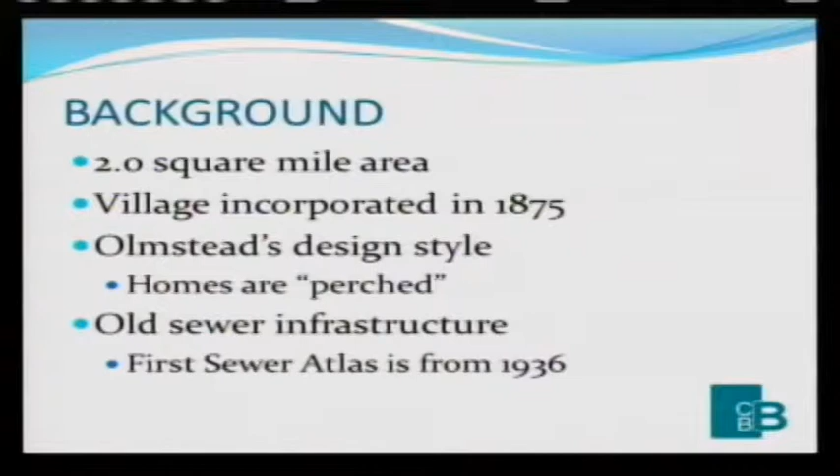Our objectives for this study were to develop an H&H model of your sewer system. H&H stands for hydrology and hydraulics. Hydrology is basically when it rains, how much of that water soaks into the ground, how much runs off. And then the hydraulics is where it goes, what happens once it gets into your sewer, what kind of capacity do you have.

Another objective was to take this computer model we're going to build and have it spit out all this data. It's really good stuff to have, to plan improvements in the future. It's completely integrated and meshed with your GIS, your Geographic Information System, and it'll allow us to update and modernize it.

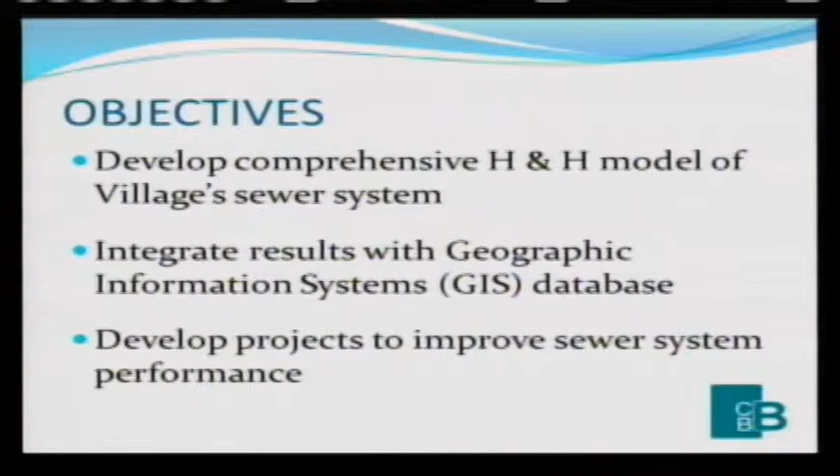Finally, the third goal was to come up with a handful of projects based on what we learned about the system, to give us the best bang for the buck. Where are the areas that we should turn to first when we start to look to improve the system?

As was mentioned, Riverside is primarily a combined sewer system, meaning there's one pipe in the street which carries both storm water and household waste. When it rains, the water gets into the sewers, and it's also connected to everybody's home, so all your household waste goes into the same sewer. There are a few intermittent storm sewer systems that discharge directly to the river, generally on the west side of the village. There are also some relief sewers built over the years that supplement capacity.

All those different sewers go to one of three places: either the Des Plaines River, where the storm sewers discharge directly; the MWRD interceptor pipe; or the TARP system. These are basically big MWRD pipes that collect that combined sewer water and take it to be treated.

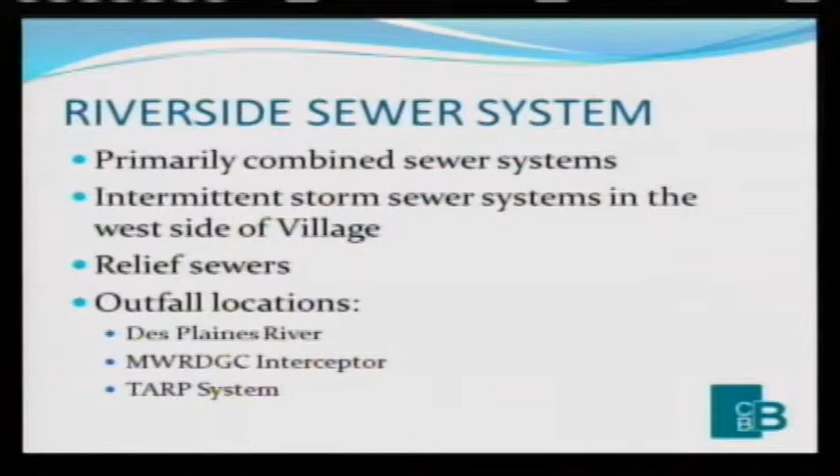This graphic depicts that. Up here is your local combined sewer, the sewers on all the streets that pick up water from the streets and yards. You can see from the picture that your house is also tied into that same pipe. That drains through the network of streets and is first connected to the MWRD interceptor pipe. In Riverside, in most places, it's an 84-inch pipe, a big pipe, and it flows south to the Stickney plant where it's treated.

When that pipe eventually fills up, the water's got to go somewhere. Historically, it would have flowed directly out to the river. That's called a combined sewer overflow, a CSO. Obviously, when that happens, you've got some unhealthy water going out to the river, and that's what we try to avoid.

Over the past few decades, the MWRD has been building their TARP system, the tunnel and reservoir plan, which intercepts all that water that used to go to the river and collects it in giant underground tunnels, taking it to one of several reservoirs. That system isn't complete, it's still under construction, so it does frequently fill and has a finite capacity. When it fills, those CSOs still happen, and there are three of those CSO locations in the village.

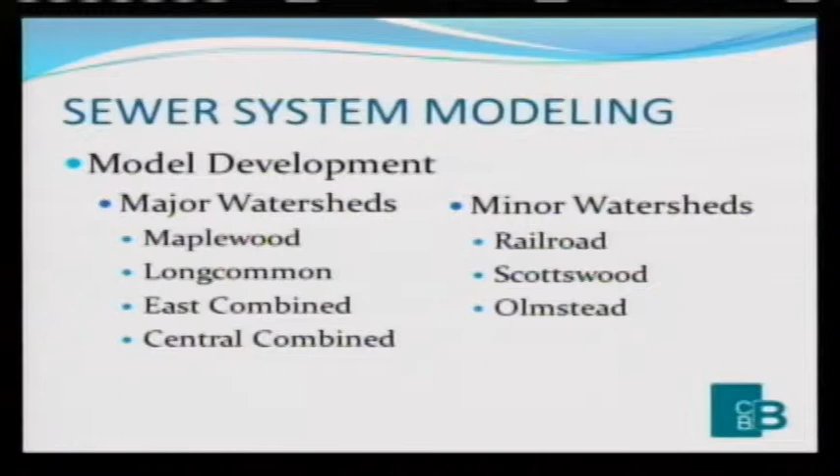When we start to review all this data, the first thing we determine is where the major and minor watersheds are, where the systems come together. We identified four major and three minor watersheds, shown here on this figure. You can probably see them better in your packets, but I'll talk through them briefly.

The biggest one, on the east side of the village in yellow, we're calling the East Combined Watershed. It's strictly combined sewers here. The main sewer is a trunk that runs down Delaplaine down to Ogden and ties into an MWRD sewer along the river. That watershed is about 315 acres, the largest of these systems.

In green here, we call the Olmstead watershed. That's drained by a relatively small pipe, a 26-inch pipe on Olmsted that ties into an MWRD sewer.

In pink here, kind of in the center part of town, we call that the Central Combined Watershed. Again, combined sewers. Its main trunk sewer runs right down through the center of town here. That's a 48-inch pipe that ties into the MWRD sewer.

The remaining systems, this one in blue here, Maplewood, this is the largest storm system you've got. This one is completely separated, so everything in blue here drains directly out to the river. That watershed is 80 acres.

The two remaining: the area west of the river has a storm sewer system that comes across the river right at the railroad there. We call that the railroad watershed. And finally, Scottswood watershed - I'll probably refer to this as the peninsula at some point because that's kind of what I've been calling it. This area is partially storm, partially combined, but it connects to a combined sewer that runs right along here. So that's kind of the lay of the land.

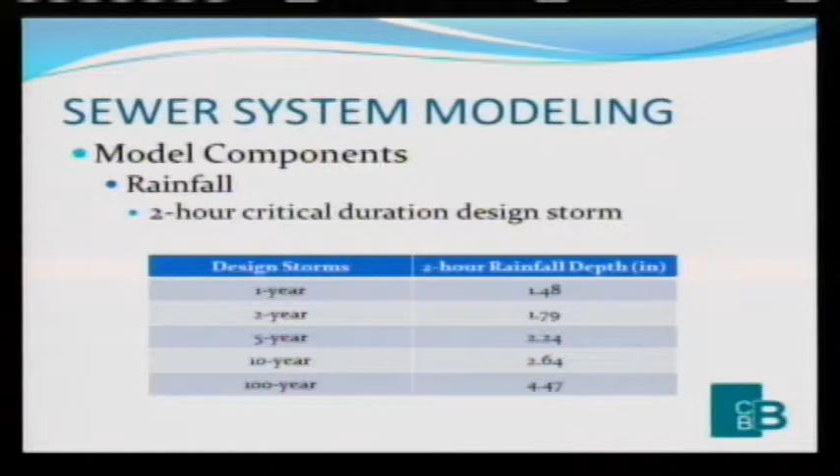So this is your worst-case scenario? Your worst-case scenario is what we're... Okay, but I'm not getting why a 2-hour storm would produce more runoff than a 6-hour storm, is what I'm not understanding. Because it falls in a shorter period of time, it's more intense. Oh, when it's concentrated. It's more concentrated, okay. Yes. All right.

Yeah, and if anyone, feel free to jump in and stop me if something doesn't make sense, or if you have a question, I'd rather you stop me now.

Many of the towns we deal with have more of these depressional areas - this is not Riverside. Typically those overland flow routes tend to converge on these depressional areas. These would be areas where the streets, for whatever reason, are just lower, and all those overland flow routes converge - you may get 100, 200 acres draining to one block that receives the brunt of that runoff. You have very few of these in the village, and you should be thankful for that. That goes back to what we talked about, the Olmstead design.

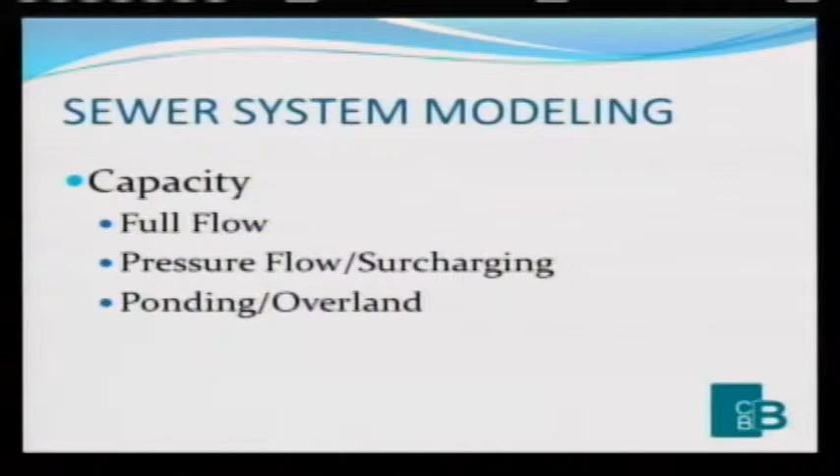Well, unfortunately, that's a bit of a nebulous term. It's a little ambiguous. There's different ways we can define capacity. So I wanted to talk about a couple different terms, the way we would describe it, to give you an understanding of what that term means. The three different terms we'll talk about are the full flow capacity, the pressure flow, and the overland flow.

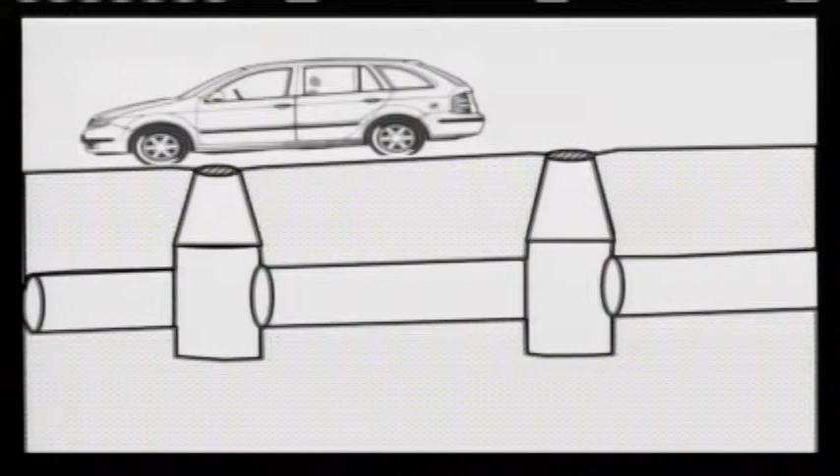We've got a little cartoon graphic - this is your sewer system. Here's a typical manhole, street elevation on top. As it starts to rain, water comes into the system and by gravity starts to flow downhill. This is just run-of-the-mill flow. As the storm gets bigger and we get more rain coming in, it starts to fill up that pipe.

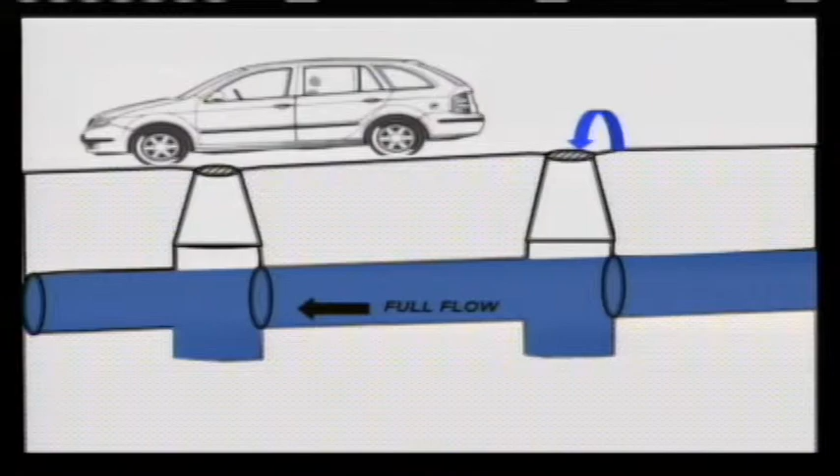Very logically, when the pipe is full, however much water it's carrying, that's what we call the full flow. That's strictly based on the size of the pipe and the slope of the pipe. That's one way to say what the capacity is. But that's not the most flow that the pipe can carry.

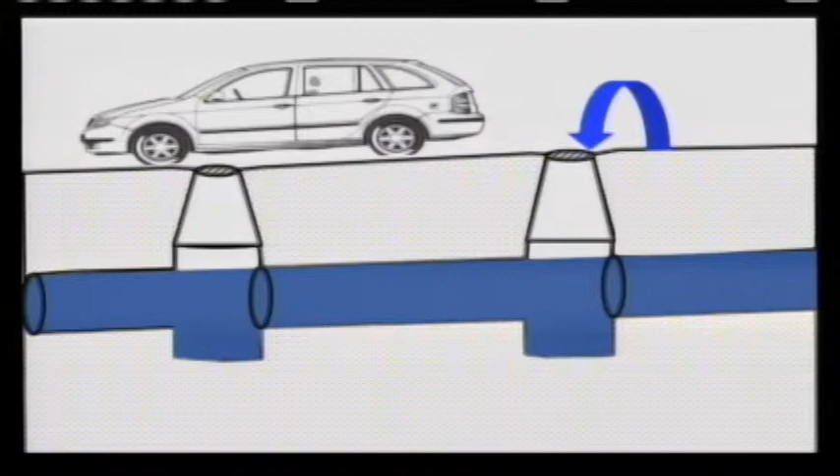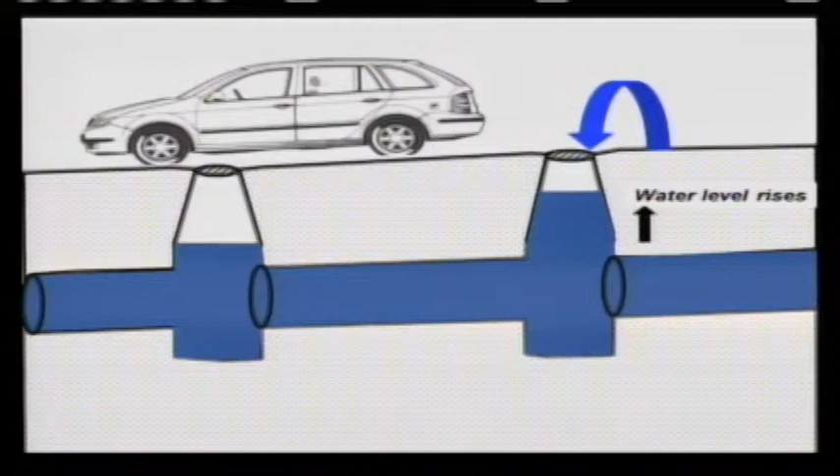We know when we get these big storms, we get more and more water coming into the system. And when that happens, the water level in the system rises. That rising water puts everything under pressure and pushes more water through. We call that being surcharged. So when the pipe is surcharged, it's carrying a little more flow - it's able to push it through faster.

Your engineering 101 term of the day: if you were to connect all the lines in the system, all those points, that creates a line we call the hydraulic grade line. It's nothing more than an indication of where the water level is at a certain point at a certain time. That's the hydraulic grade line - you may hear that term later. So that is the description of a surcharge condition.

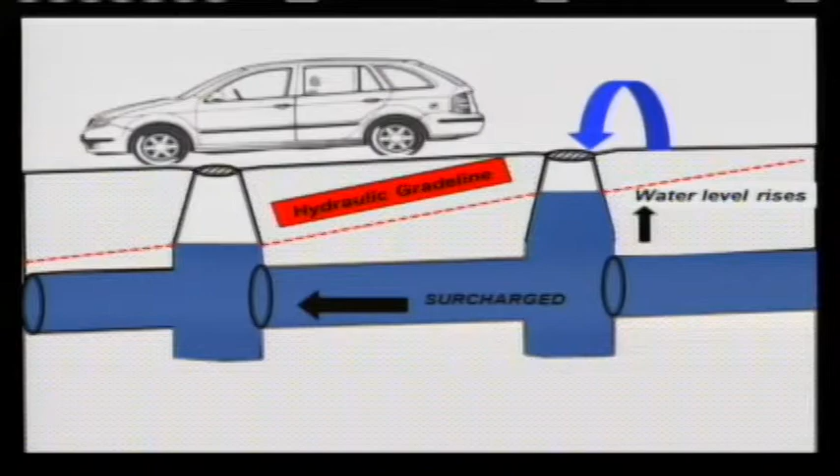And then when we get these really big storms, eventually the sewers can't handle it. It gets up to the surface, and there we've got overland flow. So when we have overland flow, at that point, that's really the maximum flow that the sewers can handle. We call that overland flow.

So as I mentioned, we have all this information in the model. We run all these different storms and it simulates what the capacity is. Really, the answer to that question kind of lives in the model - it's built to be viewed in the model and interpreted that way. So one of our challenges is how do we put it on paper in a way that makes sense? We've done that in three different ways - three different sets of exhibits in the report.

Surcharge depths, overland flow paths, and then something we call the sewer capacity atlas.

Here's an example of a surcharge depth exhibit - you've got these in the report. What this drawing shows: every dot on the drawing represents a manhole, a point in the sewer system. We've color-coded them and broken them down - you see in the legend there, a green dot means that hydraulic grade line, that water level, is at least 3 or more feet below the surface, below street level.

3 feet was just an arbitrary number we picked - there's nothing really important about 3 feet. The yellow dots mean it's somewhere above that 3 foot line and street level, so it's near the surface. The red dots mean the water level is above street level, so you would have overland flow like we talked about. So here's the 10-year storm.

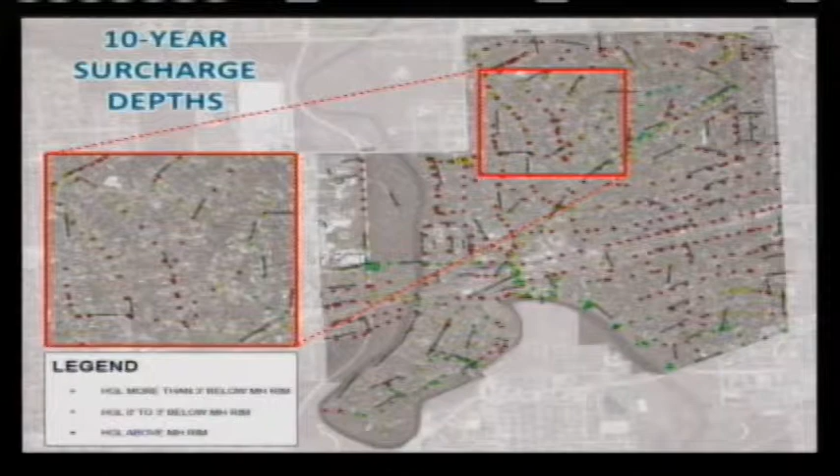So that really is the first bullet point, our first objective, the evaluation of the existing sewer system. Those exhibits are the way that we can display the results. They're also in the GIS system that meshes with the system you have, so all that information is there digitally.

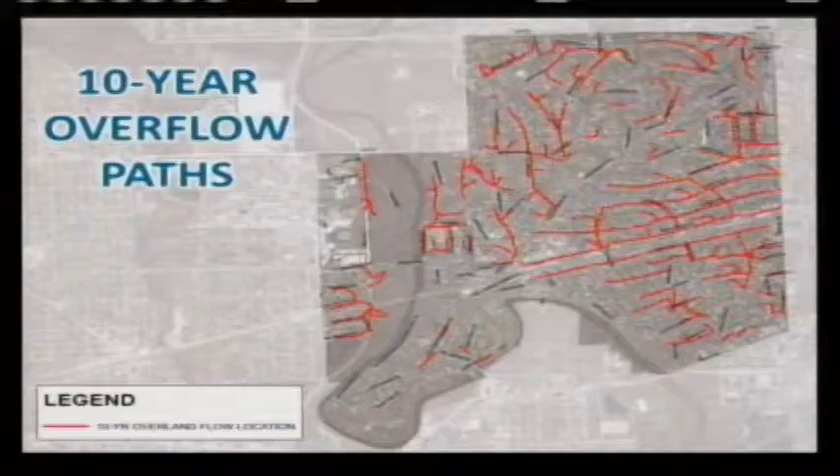The combined sewer overflows or outlets. Overflow. Yep, so just to make sure I understand how this works - first it would go into the interceptor. If you can bring that back up, the figure on the third slide you showed.

So it goes into the combined sewer - does it automatically go out of the CSO if there is a CSO on that line, or does it first go into the interceptor, and only go into the CSO if the interceptor is full? It will first go into the interceptor - this is a generic figure, but the way it's connected, it will dump directly into the interceptor and won't be able to get back out unless it's full and rises up to the surface. And does that just happen automatically?

Are there valves or gates that have to be open to allow this to happen? No, that all happens automatically. There are gates at certain points of the MWRD system, which leads to the perception that someone closed or opened a valve - that's always a point of contention after a flooding event. But within the village and vicinity, there are no valves. It all happens automatically by gravity, just by flow of water.

When the interceptor's full, there's nowhere else for the water to go. It'll flow out to the TARP, and if the TARP is full, it will flow out to the river. So it's interceptor, TARP, and then CSO in that order. Correct. CSOs are not common - only in very old villages, because we have to have them monitored all the time.

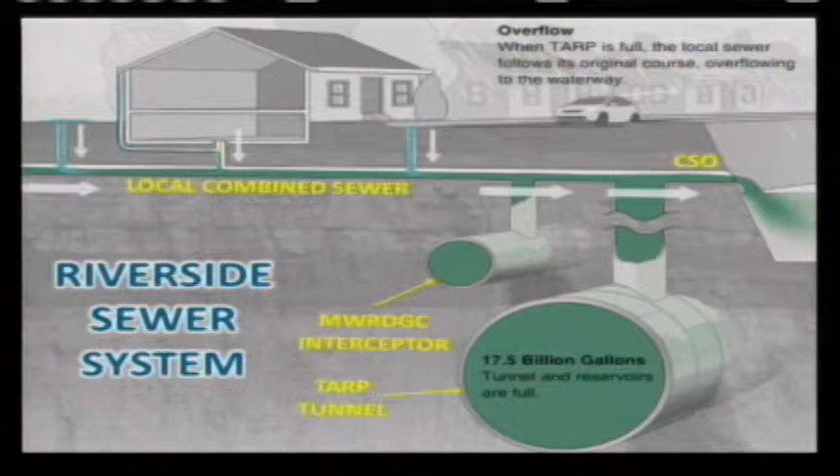Once the water's in the interceptor or the TARP, I don't know exactly what controls MWRD has on it in the region, but as far as this slide, at these connection points, there are no valves to be closed. I thought we had more connections to the TARP tunnel than the Metropolitan Tunnel - do we have more than one? Isn't there one by the high school, a drop shaft to the...?

Well, this blue line is the TARP tunnel. Right, it goes off the page here, and at First Avenue there's a connection to another major TARP tunnel. Right, and that drops to the deep tunnel? The deep tunnel is another term for the TARP system. But the one on First Avenue is particularly deep and large - I think it's a 33-foot diameter. 33, right. And that's part of the deep tunnel project?

Yes. And when are the rest of the reservoirs within the TARP system supposed to come online? Are there two that still aren't finished? There are 2 reservoirs under construction, with some phasing to them - I think there's a temporary reservoir that's online. I thought the last I saw was 2017 for when the McCook Reservoir would be online. I think that's correct. Anything else? Thank you.

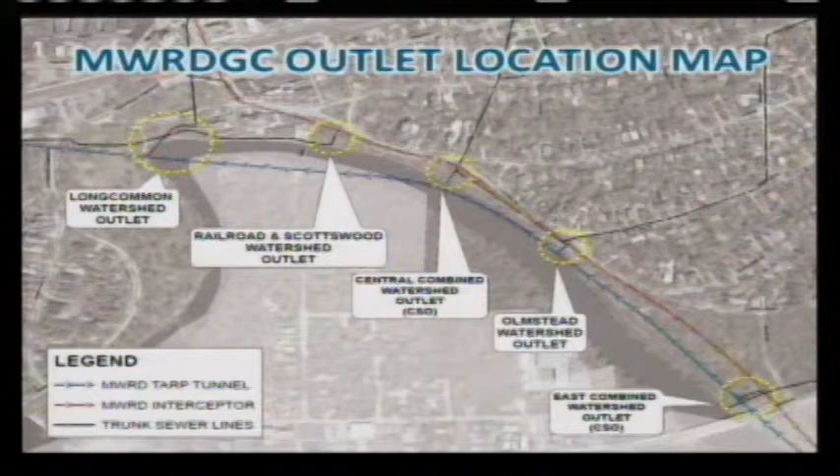So let me skip back forward.

So now we'll talk about this. We've established the existing system capacity and parameters—we know everything there is to know about it. So now we're going to look at what sorts of projects we'd recommend. Not necessarily the main problem areas, but given what we know about the system, what projects would be low-hanging fruit, easiest to get working on right away, taking advantage of opportunities the system gives us.

For each project we're looking for the lowest cost, things easy to construct. We always want projects that reduce the potential for basement and sanitary backups. Wherever possible, we look for areas where we can separate the sewers—that's good environmental practice and helps eliminate the connection to the combined system, which is consistent with the village's green initiative.

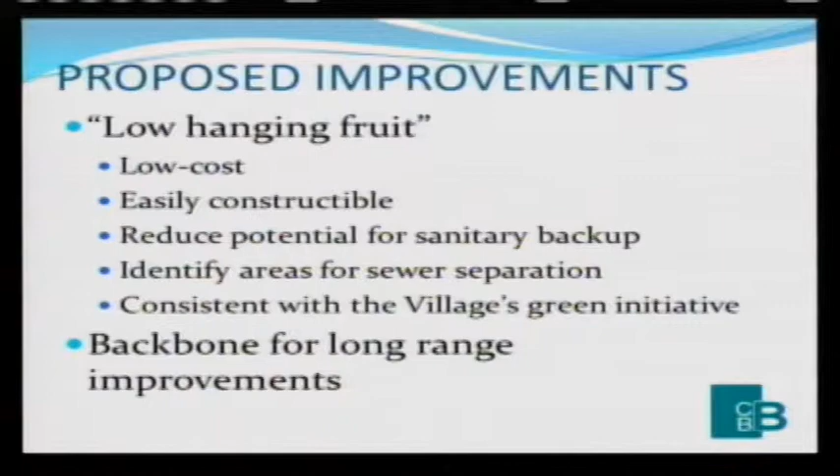Beyond those, we've identified 8 projects here. Beyond that, the work we've done will serve as a backbone, a template to develop other projects if there's even longer-term planning we want to do.

At the end of the presentation I'll show a drawing of how this map would change if we implemented these projects—more blue storm area and less combined area.

The first project is in what we're calling the railroad watershed, the area west of the river. The area shaded in green, about 40 acres, already has storm sewers out there—they've been separated and converge at a point just south of the railroad. They cross under the river and tie into a combined sewer, which flows east into the MWRD system. We're introducing 40 acres of water into this 24-inch pipe, which connects to all the basements in the Scottswood area. So we want to take that water off the system.

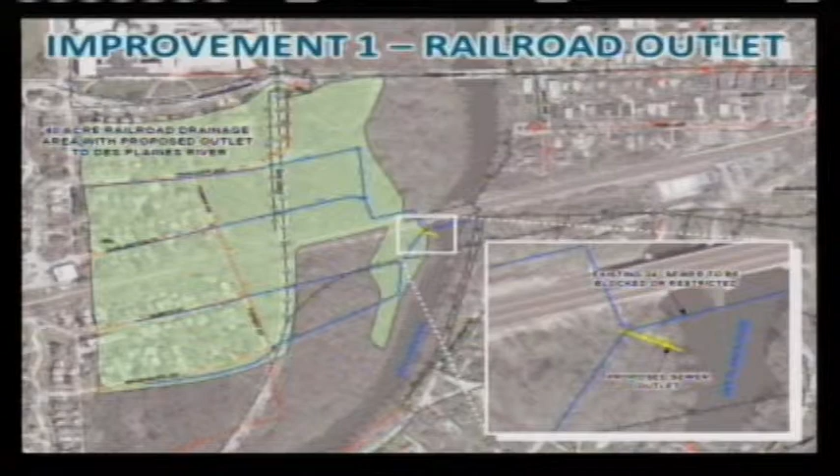Because the storm sewers are already on the ground, this is the lowest-hanging of our low-hanging fruit. Before it crosses under the river, we'd block that pipe and give it a new outlet to the river. This separates the 40 acres easily, takes the load off the combined sewer, and helps our neighbors downstream. This project has an estimated cost of $64,000—essentially a couple manholes and 50 feet of pipe. It's a very simple project.

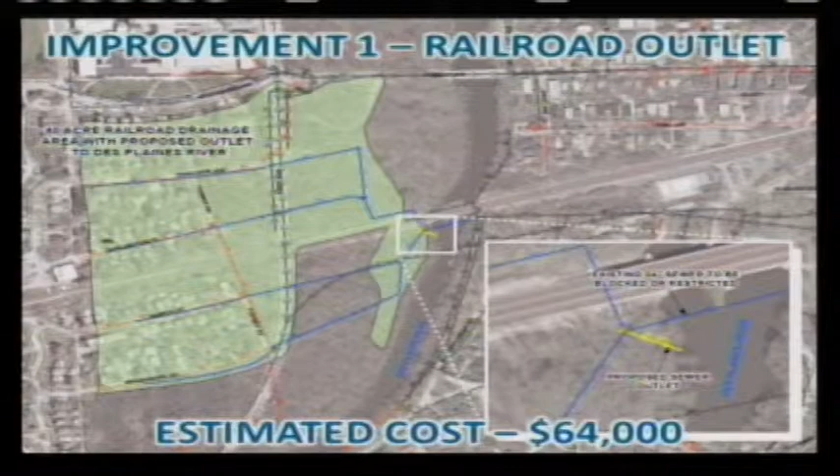The second project goes hand in hand with the first. The Scottswood area, this peninsula—everything you see on screen here is existing. These red or maroon lines are the existing combined sewers. All these streets, household drainage, and sanitary water connect into this 24-inch line.

So this line ties into the MWRD system. At times it backs up. Like we just mentioned, this 40 acres from the west drains into this relatively small 24-inch pipe, and that causes backups in this whole area.

Project 2 is primarily a project that will help with basement backups. We've already talked about how Project 1 would eliminate that area. The next step would be to remove all the water from that 24-inch line, and the way we'd do that is go through this whole peninsula and look at every street.

Where does the inlet go? Right now, there's an inlet on one side of the street that might go to the storm sewer, and the other side of the street might go to a combined sewer. It's really scattered in this area. So we'd go through and make sure everything goes to a storm sewer, adding new storm sewer where needed. That's what's shown in yellow here, utilizing existing outlets to the river. In doing this project, we'd basically eliminate all the stormwater getting into that 24-inch pipe on the north, the one that's causing the backups.

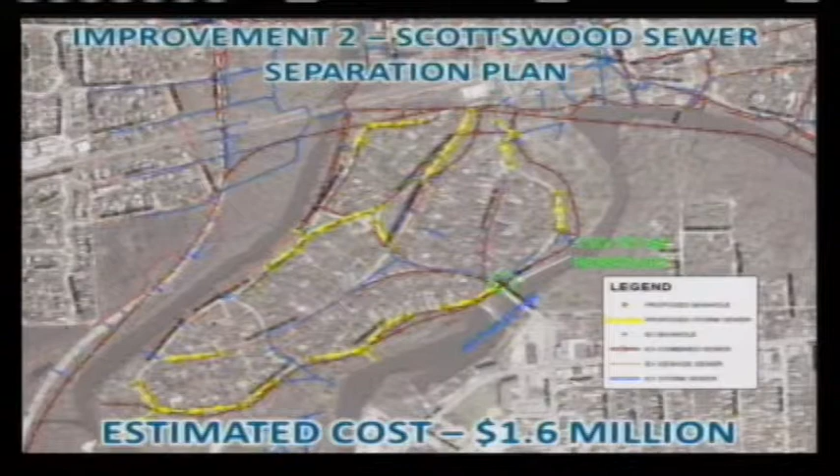So I mentioned projects 1 and 2 go together, they'd kind of go hand in hand. Project 3 is really a standalone project on Maplewood.

This is one of our already separated sewer systems, but we've got a lot of overland flow area that comes down, and this is one of those depressional areas I mentioned. All the water from those 80 acres or so collects down in this area. This is also a spot where when the river gets really high, at flood stage, you get overbank flood from the river that fills this area.

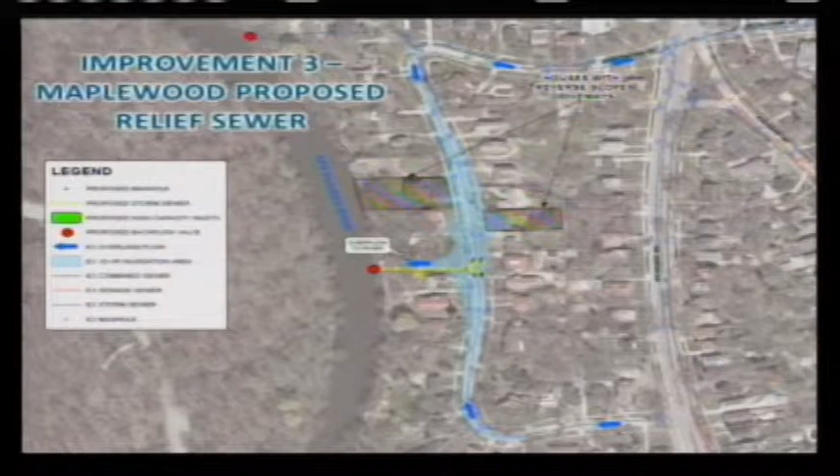So this project would just give some more capacity, an additional outlet to the system. We're showing a 30-inch pipe. The project would include a handful of inlets at that lowest point to collect the water and send it out to the river, so that when you get that overland flow and ponding in the street, it allows us to get it out to the river. That's got an estimated cost of $150,000.

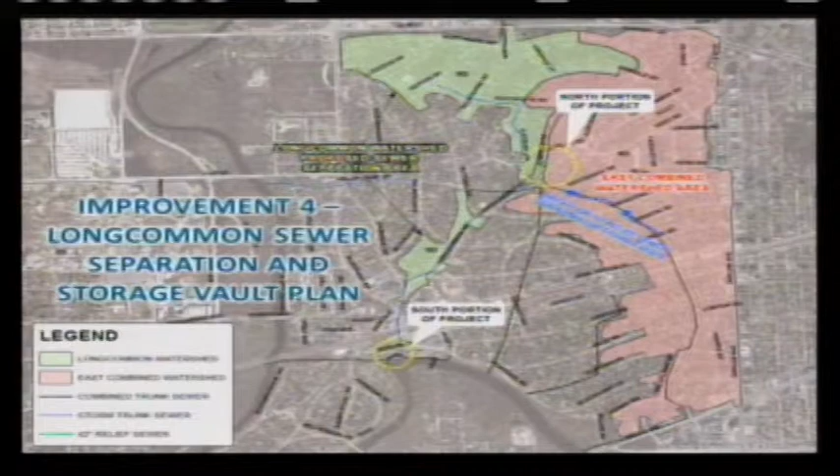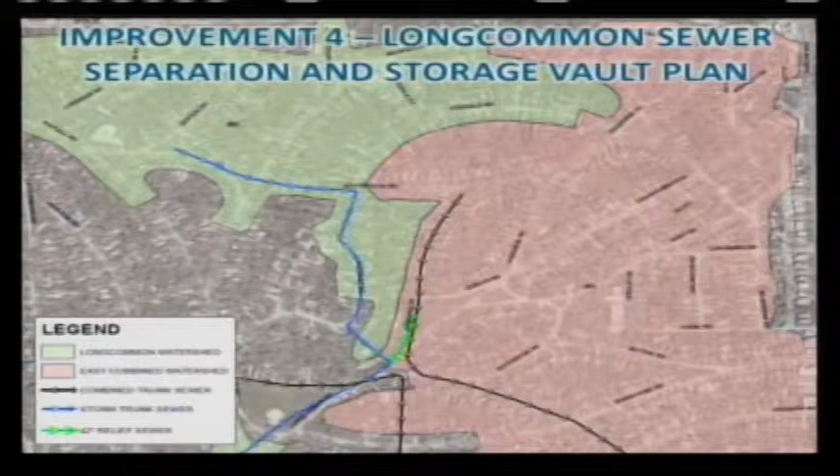So the project would be, how do you eliminate that cross connection? Very simply, you block it. So we eliminate the connection between the two, but we need to recreate what it did. That 42-inch pipe provided a relief to the combined sewer, allowing it to dump into the storm. We need to recreate that because we don't want to cause problems where there's not problems today, or make things worse for anybody.

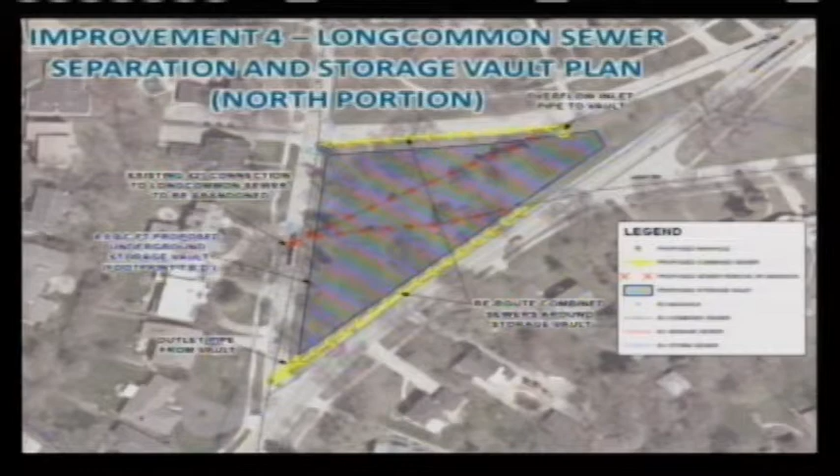And then the second part of the project is down by the river. Here's the Long Common storm sewer. We've separated out all the combined water from it. We've got pure storm, so we can take it out to the river and eliminate this TARP connection so we no longer get that back up. The cost of this project is $2.8 million.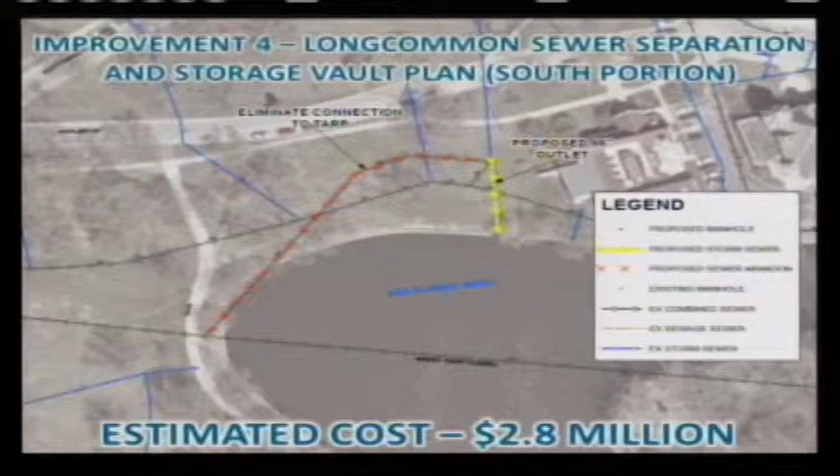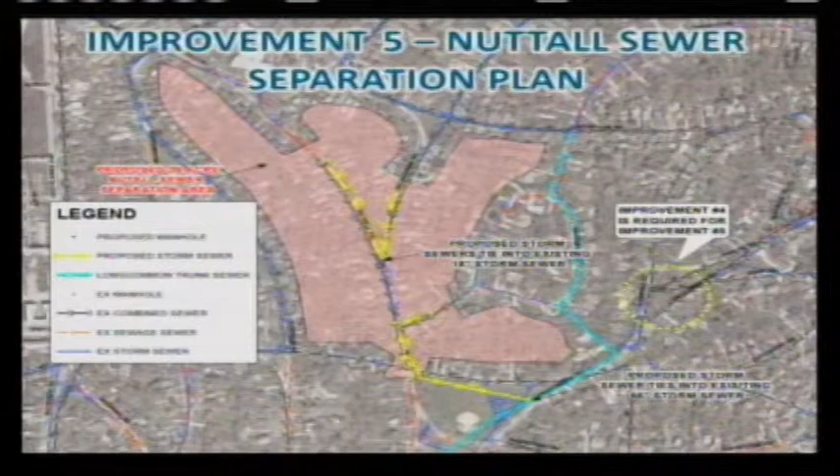And the cost of that is $570,000.

Project number 6, we're just calling rear yard storm sewer connections. These are the areas we talked about where there's depressional areas in the rear yards that hold water. And the project would be, we would look at these on a typical basis. There'd be a lot of coordination with the property owners, but putting some drain structures in the low points, some catch basins, connecting them with small pipes and draining them out to the streets. Small pipes so that we're not overloading the sewer system, but yet we're allowing it to drain quicker than it does today where it just soaks into the ground.

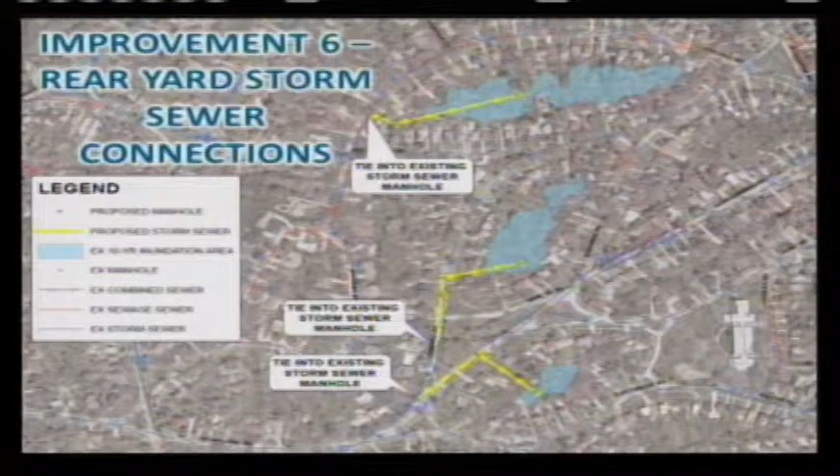We show 3 here as examples, but this could be extrapolated to other areas. And generally, we've calculated a cost of about $75,000 for each one of these rear yard areas.

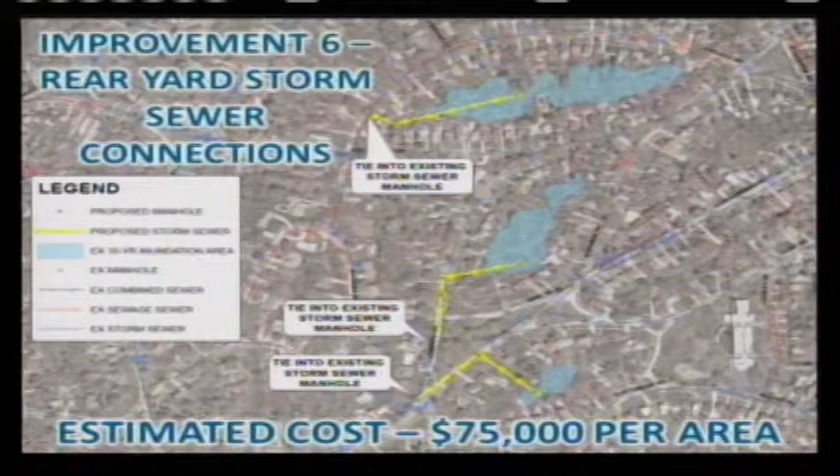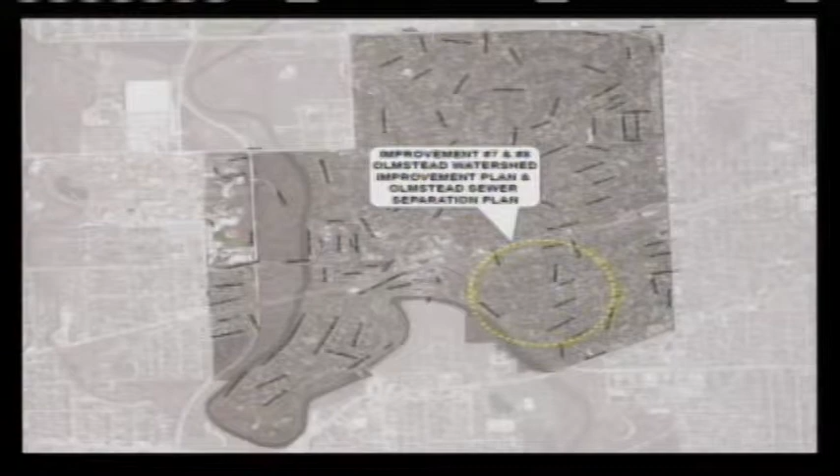And finally, we've got Projects 7 and 8. I'll talk about them together because you would do one or the other, not both. This deals with the Olmstead watershed. That was a 100-acre watershed that was drained by only a 26-inch pipe, so it doesn't have real good capacity.

So the first thing we looked at was Project 7, where because some of the other projects would take away a lot of water that's going to the MWRD, we would go back to them and say, we want to upsize the pipe, the connection we have. We want to put more water into your system, or at least put it there faster in this particular spot. So we would basically replace the existing pipe with a larger one, 36 inches what we're showing, following the path of the existing combined sewer. And it has really good benefits as far as capacity and basement backups along this path.

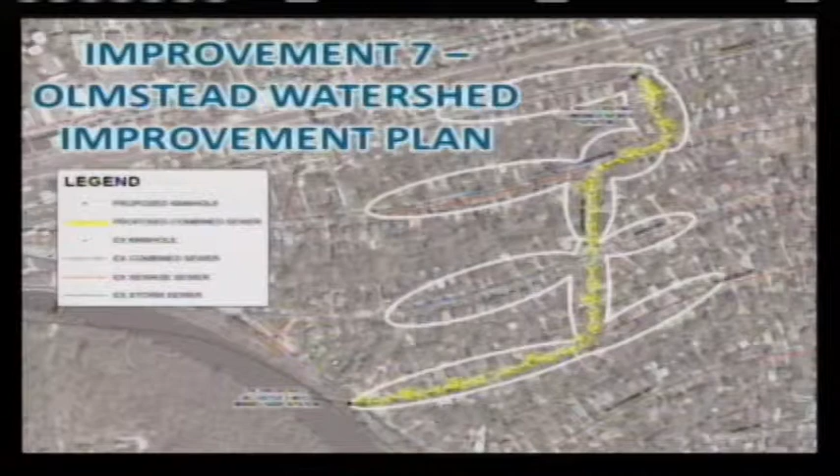The bubbles in white here show the areas that would benefit most from this project, but you can see they're kind of limited to where that new combined sewer is. And again, this would be a new combined sewer, not a new storm sewer. So we determined a cost for that project at $960,000. Didn't seem like the cost benefit made a lot of sense there, so we took it the next step.

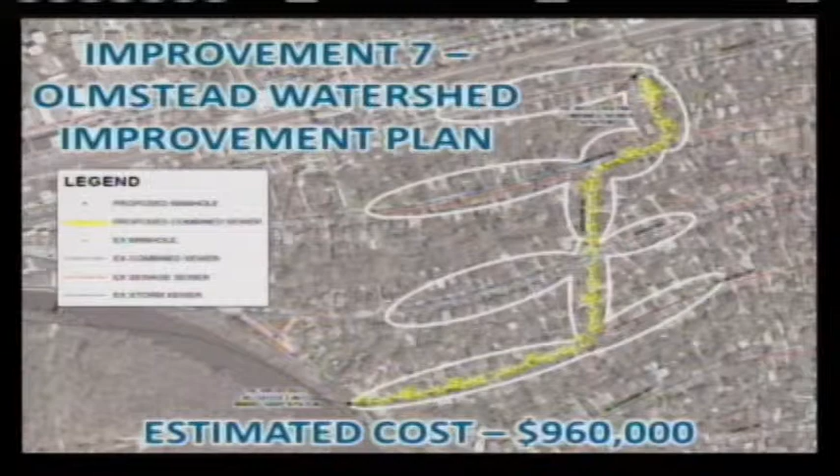If you're going in that deep, you might as well look at separating this area out. So Improvement 8 would be a more involved project, but generally this watershed would be separated. We'd put a new storm sewer system there, drain it out to the river. We'd be able to separate 56 acres at a cost of $1.6 million.

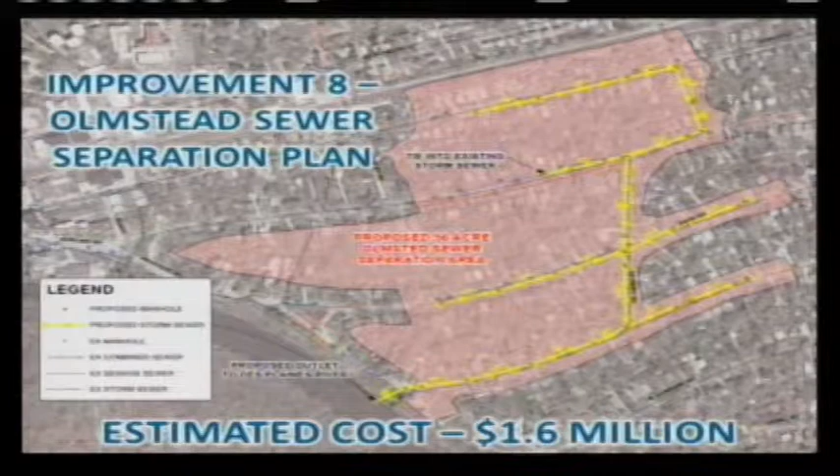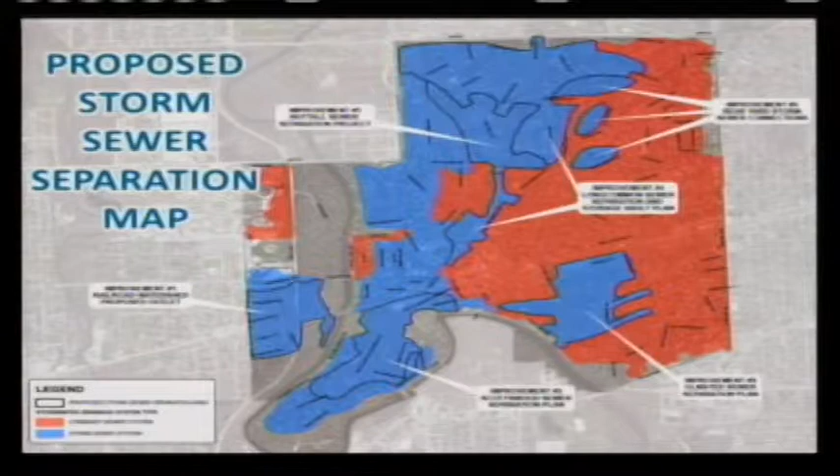So going back a few steps, this is our existing condition map of storm versus combined. The storm sewers are in blue, the combined sewer areas are in red. And if you were to implement all of these projects, here's where you would be as far as how much the village would be storm versus combined. In the callout, it shows the different project areas that would achieve that change.

And longer term than this, these 8 projects would get us this far. Beyond that, it would take much larger projects, probably another order of magnitude, to continue to separate out the rest of the red area.

Can I ask you this somewhat simple question? Sure. It's so simple it may be stupid.

If we have 3,200 households in the village, and you said backup would come into a house unless it had an overhead sewer or a check valve, if we had 3,000 households and it cost $3,000 per household to put a check valve in, wouldn't it be cheaper to spend $9 million to put a check valve in every house?

That would be one thing, and a lot of villages have developed grant programs for that. Typically I've heard between $6,000 and $10,000 to do overhead plumbing. Check valves would be something less reliable than overhead plumbing, but yeah, that's certainly one way you could approach it.

Now what would be the long-term negative effect of that environmentally? I would assume, because if you shut off all the sewage from coming back into people's houses, it's going to go downhill. But eventually it all goes downhill anyway because it drains out of the house anyway. Right, yeah, doing it in a fashion like that, a large scale individual house flood protection, you don't eliminate any of those combined sewers, and you're still treating all that water.

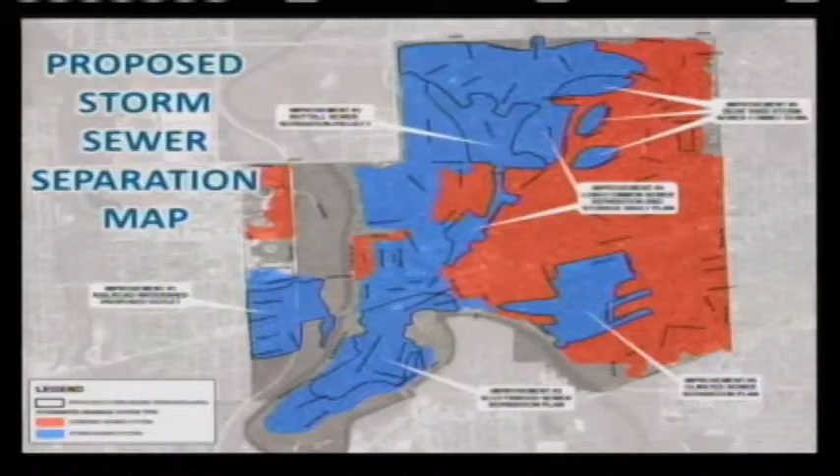I think Brookfield's offered a grant program related to check valves or overhead sewage, so if you guys want to look at that, I know they have that. We put that in our house seven years ago.

During this study, were you looking at the condition of the pipe? Did you view any footage or video of existing conditions? No, it wasn't in our scope to do any extensive televising. We've probably done some of that in general in some locations, but not comprehensively throughout the village.

Just reiterating on that, I do have a copy of all of the televised sewers that have been done to date, and we have categorized those by condition already, separate from this. So we do have a prioritized list of conditions on sewers that have already been televised.

The only reason I ask is, Ed, I know you have your wish list of sewer projects - are any of these projects tied in with what you have on the forecast for the near future?

In the aftermath of this project, we would kind of rethink. We had some initiatives previously, before this project was initiated and now completed. Now that this project, the village-wide comprehensive sewer system evaluation, is completed, what we should be doing - and I expect we will do - is rethink these other initiatives. It may not make sense to push forward a project that's rather limited in scope when, following this presentation, there might be better ways to spend that same money that will have much more benefit. So I think we're going to go through a process of rethinking and prioritization - you could call it game planning also - and part of this now becomes financial planning also.

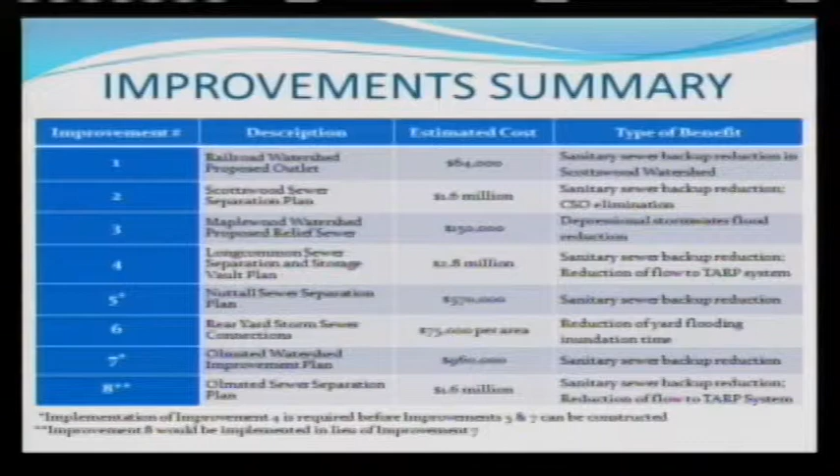If I wanted to get the maximum bang for my buck, the way it sounds is I would do - well, it depends on what the buck I had - but projects 1, 2, 3, and 8 for $3.5 to $3.6 million would give quite a big relief to this village.

1, 2, and 3 for sure. I think 4 or 5 versus 8 would be maybe a - we ranked them this way for a reason. Basically, if you look at project 4, the area that it separates per cost is a little more - you get a lot more area separated out than you do for 8, but they're pretty close. But 4 and 5 are $3.5 million versus $1.6 million.

One thing I didn't mention is these separation projects, project 4 in particular, would take a lot of water away from MWRD's treatment, and we would certainly approach them about participating or cost sharing on the project. They are accepting proposals for projects and have given out some funding, so we think these types of projects would be favorable. They look at them favorably, and that's something we would approach them on.

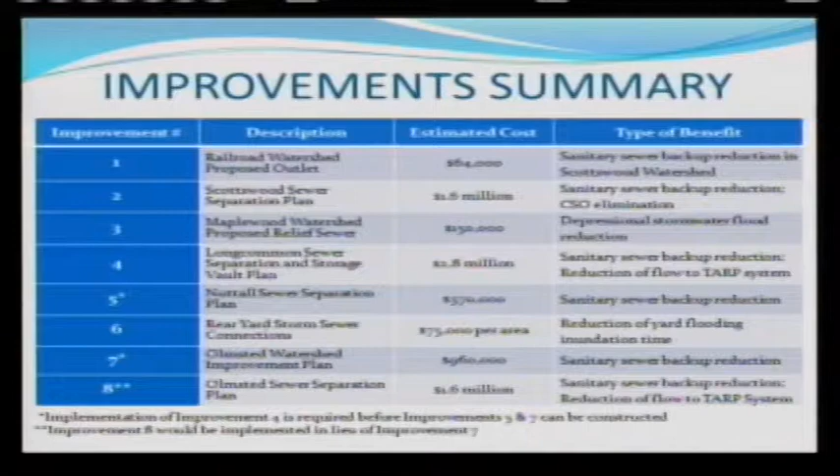Thank you very much. I just want to say to staff and to our engineers, this is a major accomplishment for our village. I've been in village government now for six years, and back then, when we first started talking about even bringing in GIS and the idea of digitizing our utility atlas - now we're seeing the accumulated progress of all that work, and this is really good work, and we really appreciate it. Thanks for the opportunity to do it. We appreciate it. Mr. Fowler?

Could Peter just kind of summarize what happens next? Well, when we do have a number of projects identified, along the lines of what Ed was saying, one of the things staff will do now is go back and we will probably be bringing some of the projects back for board consideration to move forward.

I think Ed and I and Orion are going to sit down and see whether the best time to do that would be during the budget period or to individually start bringing these projects forward, because the Water and Sewer Fund does have some money available that could be used. But for number 4 in particular, I think we would approach the MWRD to see what type of funding we might be able to get from them that would reduce costs and allow us to do something else. This seems like an ideal candidate for the bond.